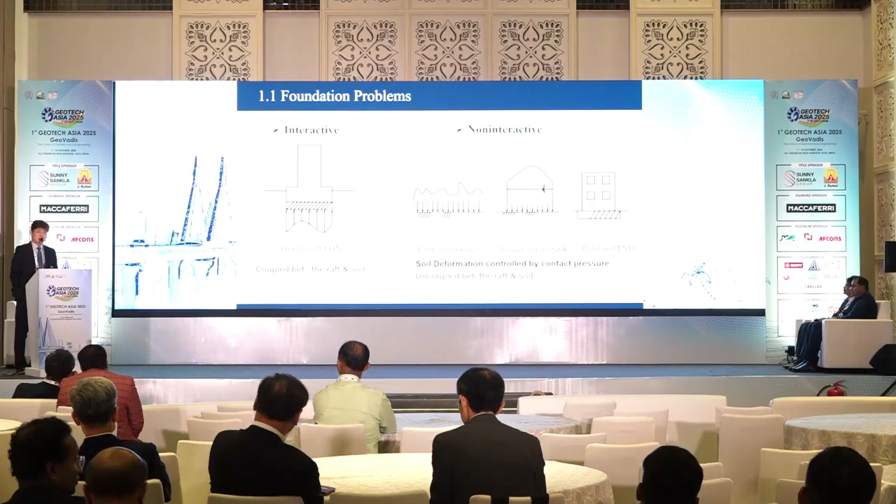This is a very typical example case you can encounter for foundation problems. The left one shows some kind of interactive problem, especially the coupling between the raft and soil. We call this an interactive problem. However, on the right, the figure shows non-interactive.

You can imagine some rigid or flexible foundations where there are no interactions between the raft and the soil; deformation is only controlled by the contact pressure. So we can define interactive and non-interactive. In the interactive case, we can imagine there are interactions between soil and foundations.

This figure shows some rigid foundation, a shallow one. The left one is a rigid foundation. This morning, Dr. Mark Barlow talked about deep foundations for laterally loaded piles, both flexible and rigid. Same as shallow foundations, rigid foundations have uniform settlement and are uncoupled from the soil. However, in flexible foundations, there are different contact pressures at different locations, a maximum and minimum, with non-uniform settlement and pressure expected. That's why we call this coupling between the foundation and soil.

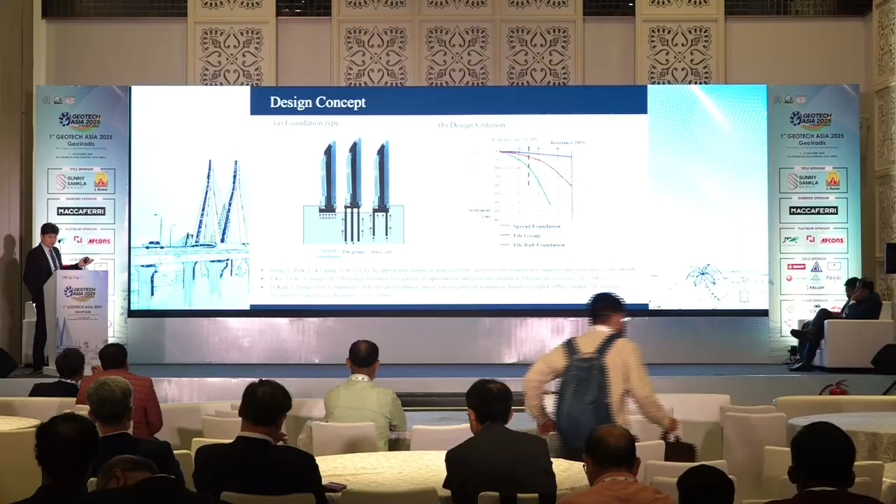Let's see a typical example of foundations supporting high-rise buildings. On the left figure is a shallow foundation, in the middle is a group of piles standing together, and on the right is the pile raft. Depending on the foundation type, we can expect different load-settlement behavior.

Why? Let's see. In this kind of concept, I published some papers on this, especially in the case of soil-structure interaction of pile-raft foundations. At the bottom are the journals where I published some papers on each of them.

So I can say most engineers these days focus on capacity-based design, everybody can do that. But in the case of settlement-based design, it's better to ensure serviceability of the superstructures. So we can make a small diameter with friction piles compared to large diameter bearing piles, reducing pile dimensions based on settlement-based design.

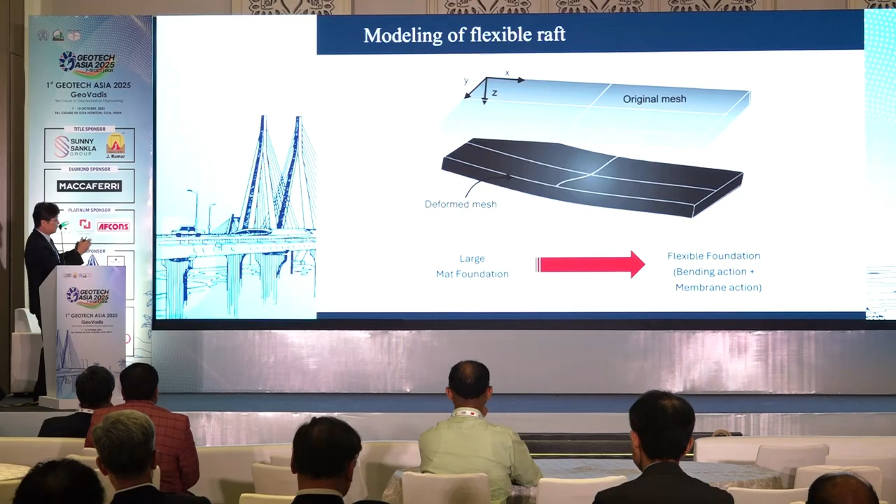Most rafts are not rigid; they show some kind of deformed behavior. I call this the flexible raft, most of them. To model this flexible raft, we can use members to account for this flexibility of the raft.

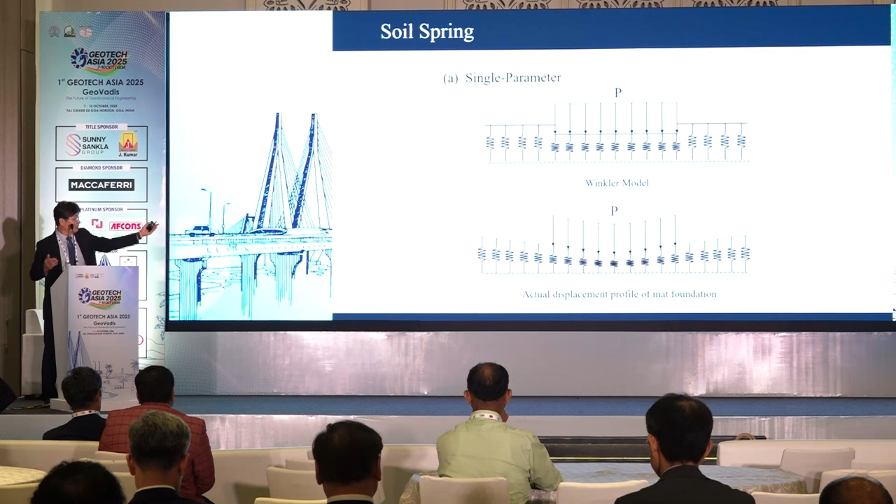So in the analysis, to account for this kind of flexibility and soil deflections, we can introduce some soil springs, like using a Winkler foundation plus some kind of shear interaction called here. I used the Pasternak model to account for the membrane effect of the foundation level.

So that's the key. This is a raft, and depending on many different loadings, like point, distributed, or bending moment applied on top of the raft, there is some resistance based on the raft and the soil part.

Account for this sequence, and next is piling. Why? It's a pile raft. So for the raft portion, we can account for flexibility in the analysis, also in the piling.

It's very simple. From an intermediate theoretical point of view, it looks like a beam column analysis. It's not very detailed, but in between simple and theoretical, it's a kind of beam column. You know well about the beam column for axial, lateral, and torsional behavior of the single pile and group piles.

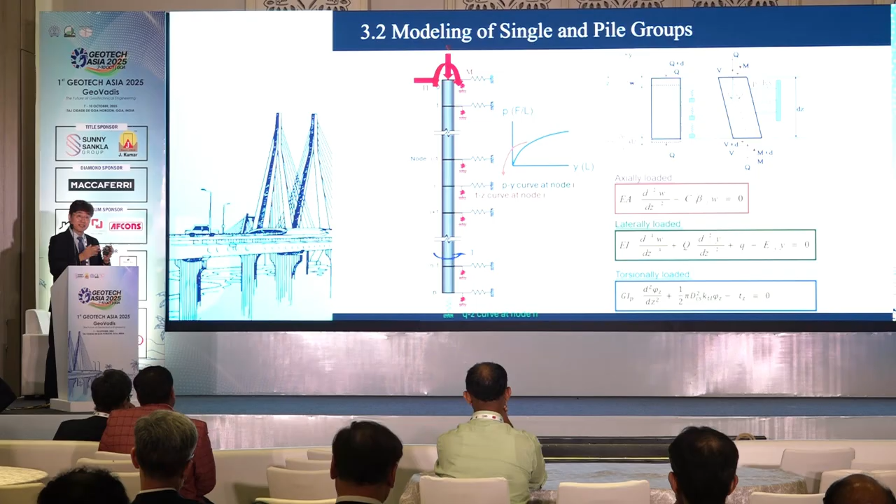Then we have corresponding differential equations, like governing equations, that we can introduce to incorporate this kind of behavior. And that's the key: it's piling and then raft.

There are interactions in between. At the interface, we call it the pile head or the raft, and there are some stiffness values like here.

At the interface, there are variations of translation and bending moment, and we can make a 6x6 coupled stiffness matrix to account for the pile-raft behavior. This is a typical case of a 6x6 soil stiffness matrix based on axial, lateral, rotation and coupling, which we introduce in the analysis.

Also, you see here that the pile raft and the piling itself are not linear in behavior. It gives us a load settlement behavior that looks nonlinear.

To capture this nonlinear behavior, mathematically there are iterations needed to capture the nonlinear load settlement behavior in the analysis.

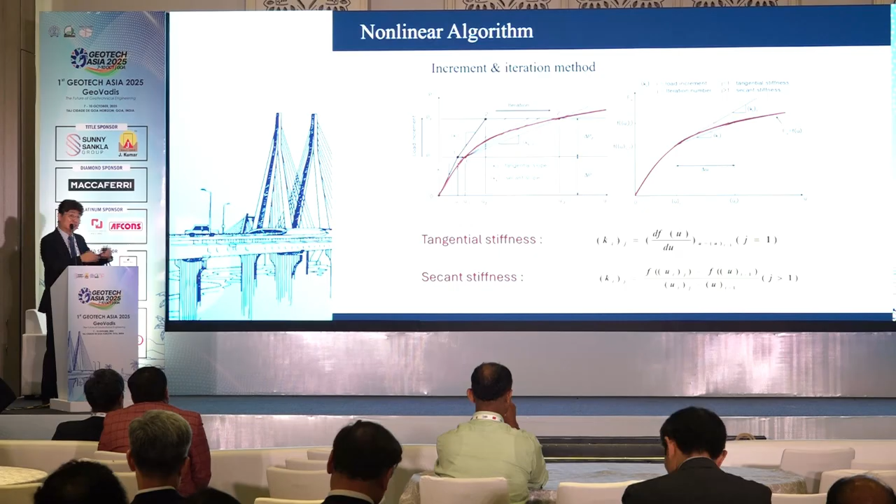To make a long story short, this pile raft has flexibility. We have the beam column and soil springs all together to involve the soil spring coupling effect. This method provides improved interaction modeling of raft, soil, and pile systems.

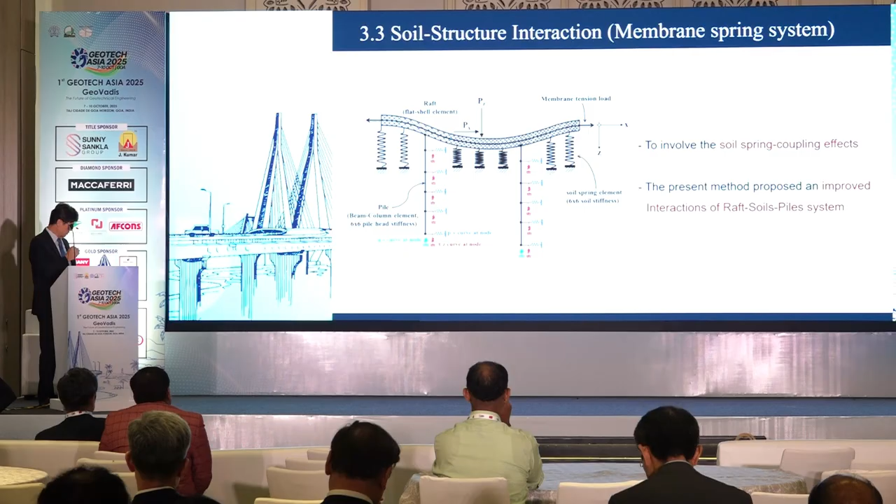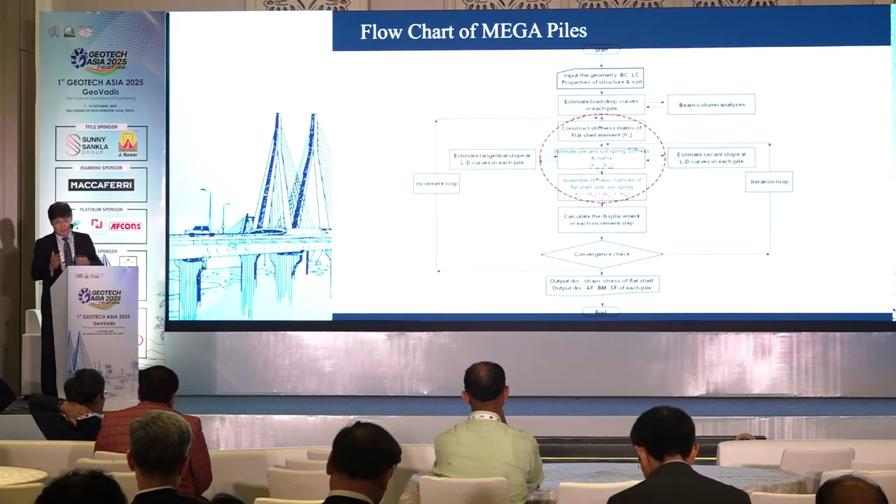This is the circular diagram showing the combination of all the stiffness contributions from piling, raft, and soil, making a global stiffness matrix. It's a typical structural analysis — you know these structural stiffness values that we can account for in the analysis.

And then finally, about 15 years ago, I proposed this analytical method to account for all kinds of external loading on this raft based on the piling systems, and we proposed this analysis for flexible raft foundation cases.

So I call this the mega piling — why? Because the piling and raft system is very mega, meaning big size, giving flexibility to the raft. That's why it's called mega piling. I made this into a commercial-style code, but it's actually an in-house code I developed, already used in the academic sector.

From now on, these are case studies we performed based on this analysis. I'm not the sole founder of this approach, because there are simple methods proposed by well-known professors Dr. Poulos and Randolph. They developed simple and complicated systems for pile-raft systems, but I also made our own code like this and compared our results with field case studies.

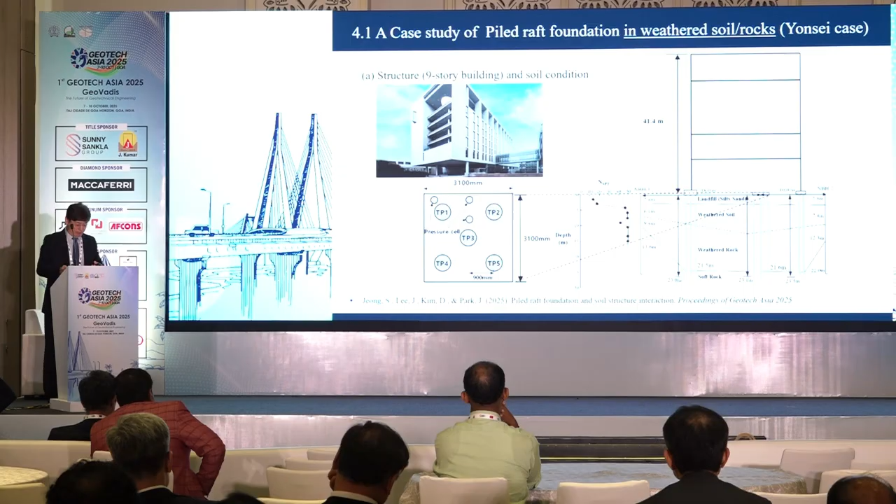And then we making instrumentations. So here, it's typical to measure the load transfer from the top to the bottom, and then we can install some kind of strain gauges and some pressure cells there.

Some of the instrumentations we performed, to make a long story short, as the building went from one-story up to 9-story buildings, we can install loadings versus the corresponding settlement of the foundation level, and then compare this measuring result with my analytical result, like here.

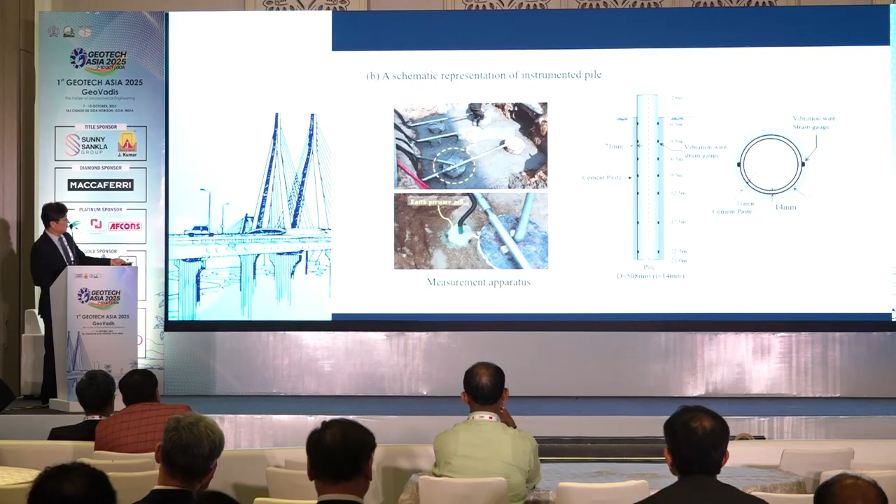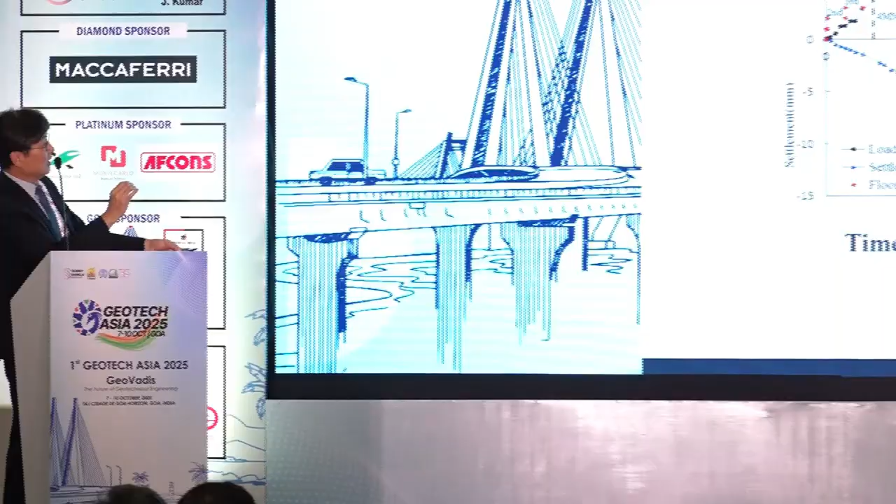This is the piling installed with strain gauges on the front and back side, and then we can make some measurement, and as the building story increases up to 9-story buildings, we can count on settlement behavior measured and compared. Our prediction result shows a dotted line, which is a kind of prediction by some mega piling code.

This is the total compared to some piling. Depending on the piling and the total loading, we can compare our calculation result with the measured result. It's not exactly the same, but we can capture most of the behavior. It looks like the same behavior as the installation process.

And then another one - there is a typical high-rise building constructed in South Korea, in a very good reconstruction site, and we have this system already done in Pohang, in the southern part of the Korean peninsula.

Our result compared, and based on thorough detailed site investigation results we obtained, and based on N-value and strength values all together. Finally, originally, our construction company made a basic original design. Based on our analysis, we can reduce the number of piles and the length of piles based on the raft analysis.

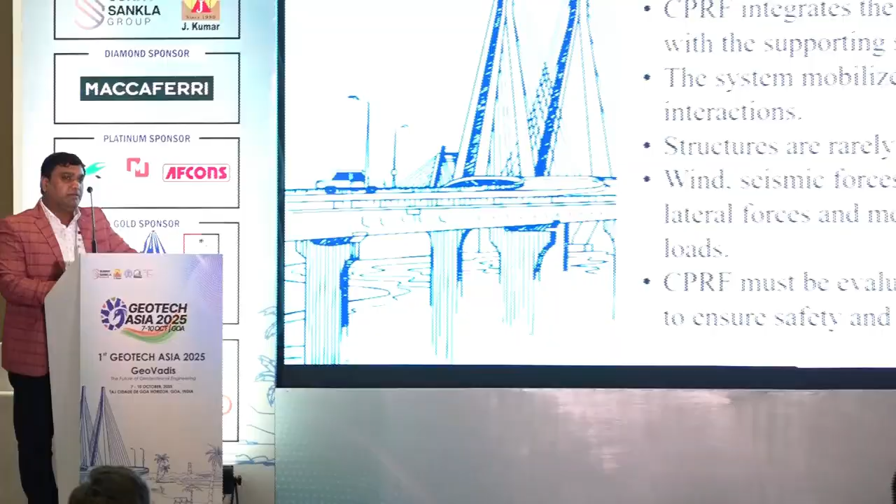As mentioned, the effectiveness of combined pile raft foundation is important for supporting high-rise buildings and heavy structures. In combined pile raft foundation, both raft and piles contribute to supporting the coming loads. While every structure has vertical loading, there can be simultaneous loading due to wind load, seismic load, and eccentric load, resulting in lateral loading. So it is very much needed to evaluate the performance of CPRF, combined pile raft foundation, under combined loading.

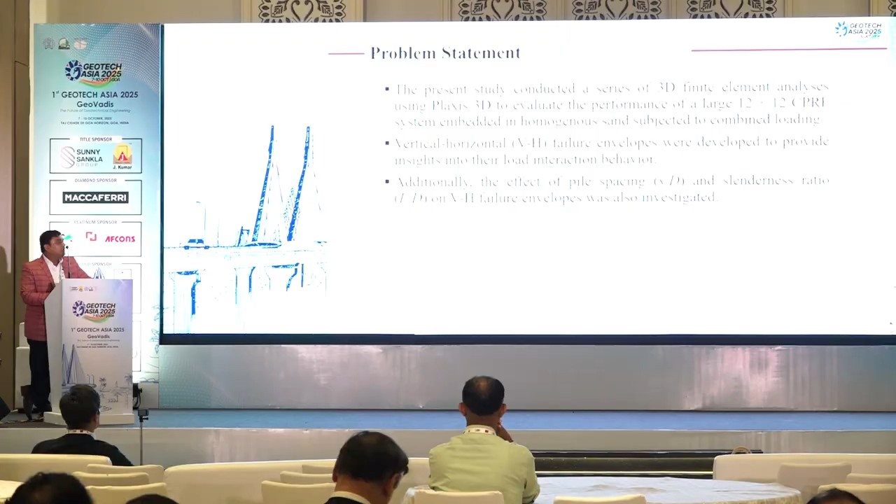In my work, I have evaluated the performance of a CPRF model of 12 by 12 configured piles in homogeneous sand, and I have developed vertical-horizontal failure envelopes to get insight into load interaction behavior. The effect of pile spacing and slenderness ratio has also been investigated.

These are the numerical models. On the left, we can see the 3D discretized model with boundary conditions, and on the right side, we can see the cross-section of the combined pile 12 by 12 group in homogeneous sand.

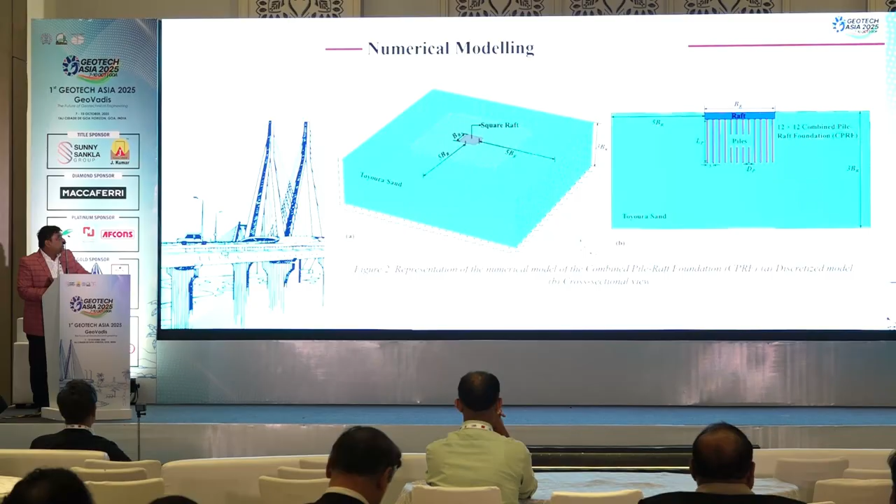In the study, I have modeled soil as Mohr-Coulomb, with linear elastic and perfectly plastic behavior. The raft and piles are modeled as volume elements with linear elastic material behavior, and the interaction between pile-soil and raft-soil has been simulated using interface elements, as shown in the modeling of piles in figure 2.

Before conducting the numerical study, the numerical model has been validated through a centrifuge experimental study conducted by Horikoshi et al., in which they used a 2 by 2 combined pile raft model in homogeneous sand. Table 1 shows the properties of the soil, raft and pile.

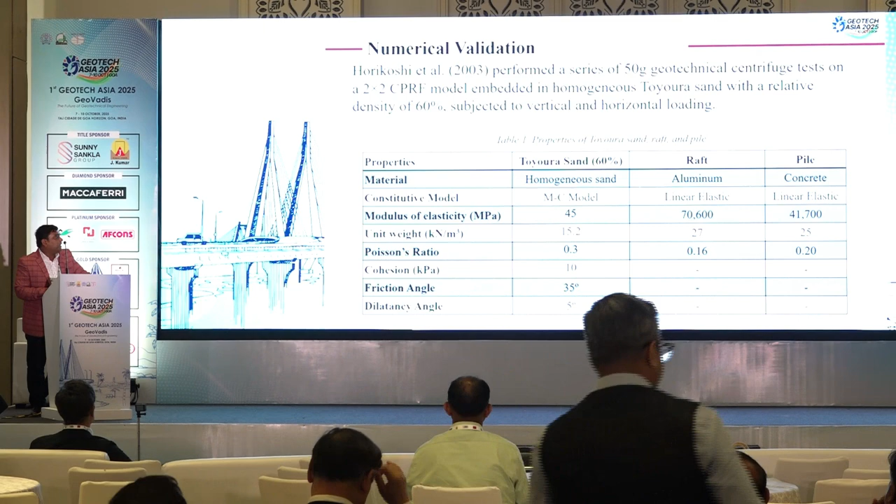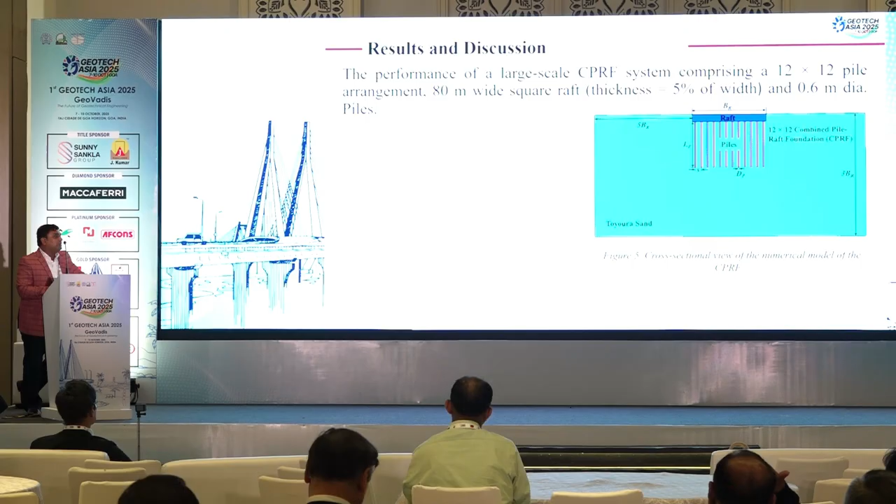For the current study, a 12 by 12 pile configured CPRF model having an 80 meter wide square raft with 0.6 meter diameter piles has been investigated, as shown in figure 5. Also, the pile slenderness ratio parameter has been varied from 25 to 40, and the pile spacing ratio effect has been investigated with variation from 4 to 7.

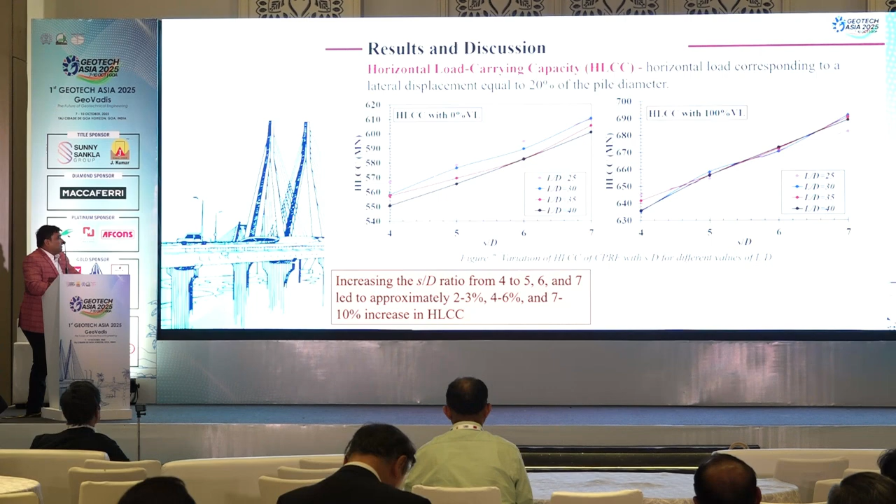Similarly, horizontal load carrying capacity variation has been investigated with and without the presence of vertical load. From the figure, we can see that with increment of S/D, horizontal load carrying capacity increases from 7 to 10%. With L/D ratio there is no significant impact, but in the presence of vertical load, there is around 11 to 16% increment in horizontal load capacity.

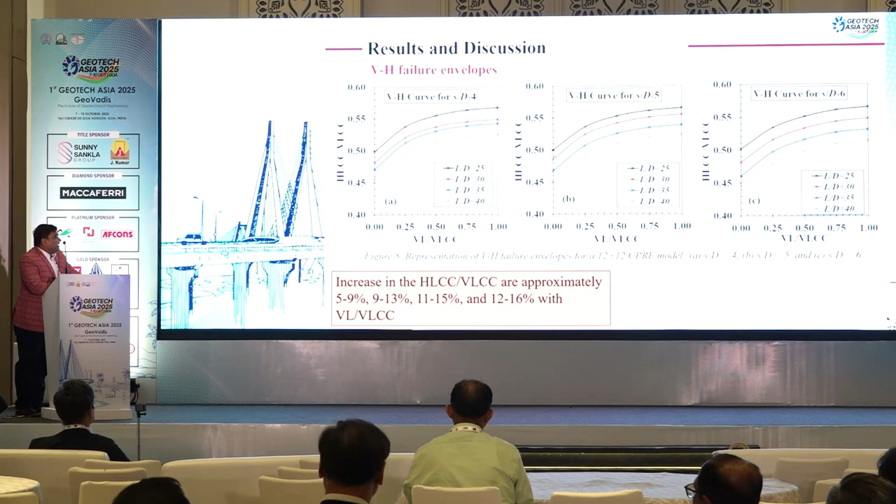Next, VH failure envelopes have been plotted for different L/D ratio and S/D ratio. We can see from the figure that with increase in the vertical load to maximum vertical load carrying capacity ratio, the ratio of horizontal load to vertical load increases, up to about 0.75, after which there is not much increment in this ratio.

Similarly, we can see the effect that with increase in L/D ratio, there is a decrement in the ratio of horizontal load carrying capacity to vertical load carrying capacity. Similarly, with increase in S/D, there is a decrease in the horizontal load carrying capacity ratio.

These are the percentage of the decrement. From the current study, the following conclusion can be made: it is very much needed to evaluate the performance of CPRF under combined loading, because we can optimize the design of CPRF.

Also, the impact of different pile spacing ratio and L by D ratio should be investigated, because pile spacings have significant impact on both vertical loading and horizontal loading. But from the current study and current model, L by D ratio effect is more significant on vertical loading, negligible effect on horizontal loading.

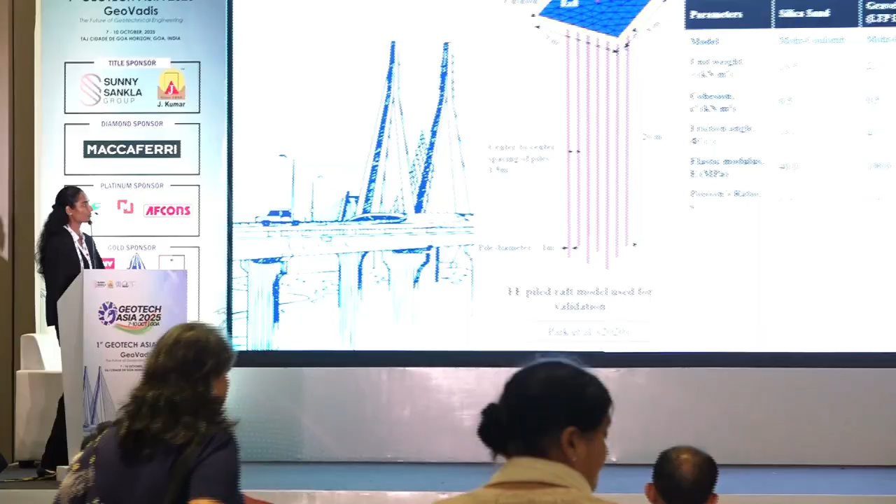To ensure the correctness of the model, a validation study was done on a 3x3 disconnected pile raft system with a 3 meter raft having a thickness of 1.5 meters. The table shows the material properties used, and on the right hand side we can see from the load settlement curve that the present analysis and FEM show 0.46 meter of settlement, which is in close agreement with Park et al. 2020, which shows 0.39 meter of settlement.

Now moving ahead with the results and discussion. For the effect of cushion thickness, I have varied the H by D ratio from 1 to 5. All the settlements are calculated at point A.

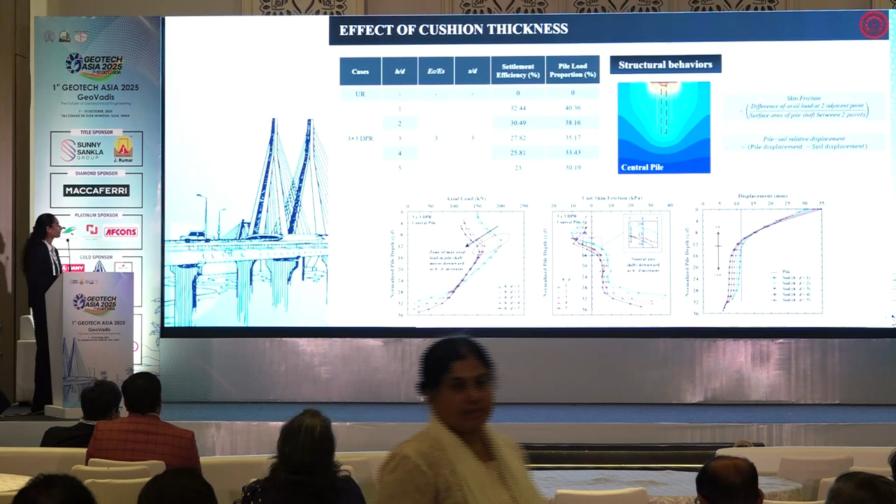Now looking at the structural behavior of the central pile, from the first plot we see axial load versus the normalized pile depth. For increasing H by D ratios, the zone of maximum axial load in the pile shaft moves downward as the thickness increases.

Next is the unit skin friction plot, in which we see that the neutral axis shifts downward as H by D increases. This can be explained through the last plot of pile-soil relative displacement, in which soil displaces more than the pile in the shallower depth, leading to negative skin friction, and below that the pile displaces more, leading to positive skin friction.

Next is the stress distribution plot. Here I have shown the stress below the raft and below the cushion. The stress below the raft is not uniform and is higher in magnitude, concentrated at the center. Below the cushion, with increasing cushion thickness, the stress is reducing and becoming more uniform. This can be further seen by the contour plots of stress on the pile head, where again with increasing cushion thickness the stress is reducing.

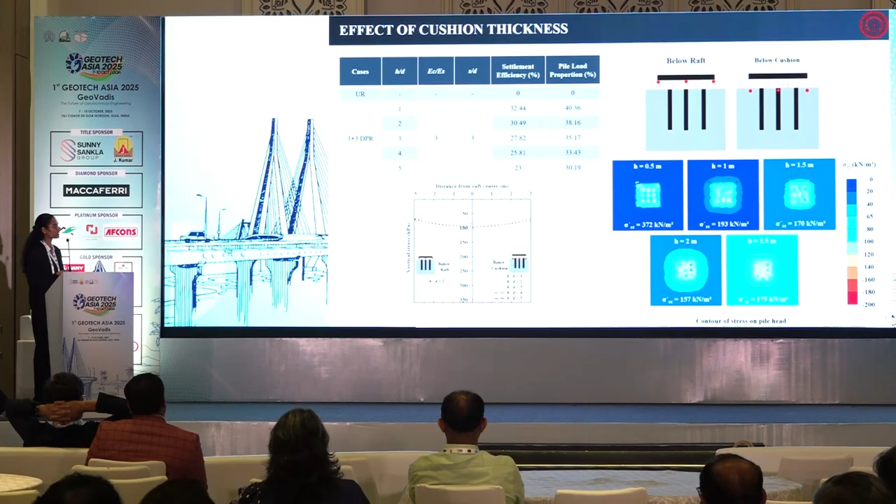For the structural behavior of the central pile, the zone of maximum axial load in the pile shaft moves upward as the stiffness increases. From the unit skin friction plot, we see the neutral axis shifts upward as the stiffness ratio increases, and the same trend is seen in the last plot of pile-soil relative displacement.

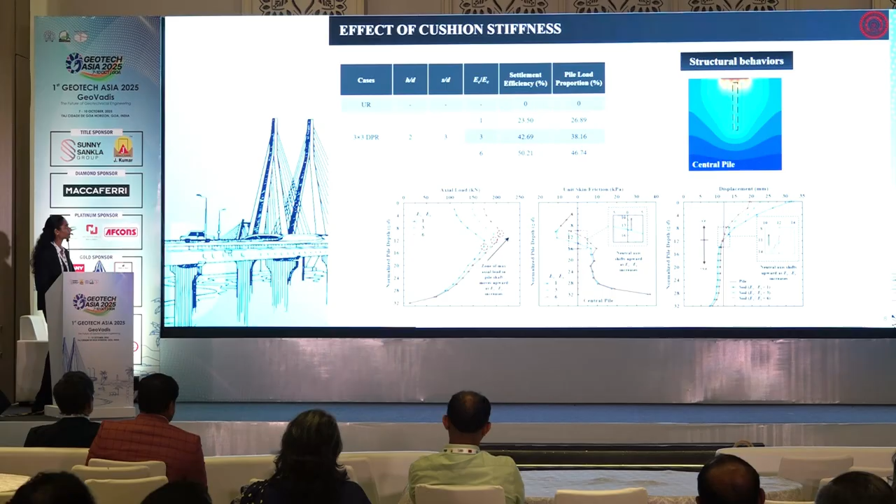Now for the stress distribution plot, we can see that the stress below the raft is increasing with the stiffness ratio, but below the cushion the stress is reducing as the stiffness increases.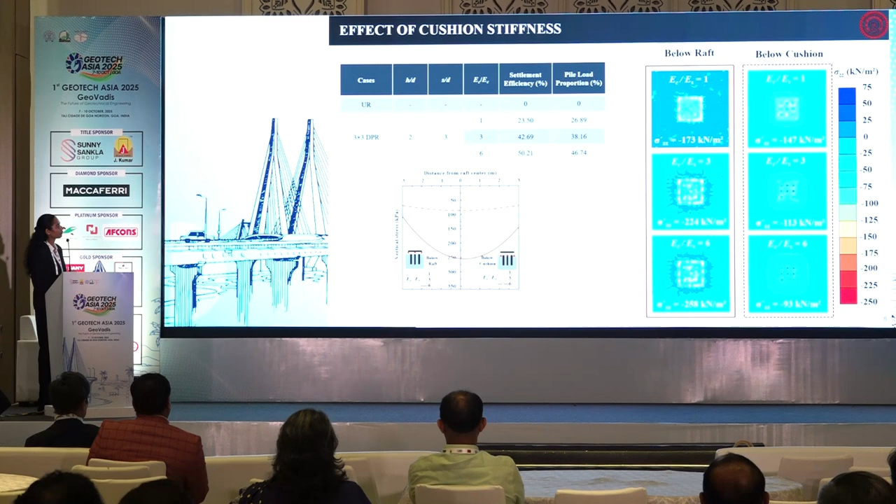This can be further seen from the contour plots, as we can see below the raft, with increasing cushion stiffness, stress is increasing, but below the cushion it is decreasing.

Going ahead with pile spacing influence, I have varied the pile spacing from 2D to 4D. From the load settlement curve, we can see that for unpiled raft, settlement is highest, but for all DPR cases settlement is less than that. For 2D we can see the difference, but for 3D and 4D it's almost matching, and pile load proportion is around 35 to 38%.

In structural behavior, the zone of maximum axial load of the pile shaft moves downward as the S by D ratio increases. The same can be seen from the unit skin friction. In pile-soil relative displacement, soil is displacing more at shallower depth than the pile, leading to negative skin friction at shallow depth and then positive skin friction.

For the stress distribution plot, below the cushion, for 2D spacing stress is around 125, and it reduces by almost 25% when increasing pile spacing to 3D, with minimum marginal change for 4D spacing. This can be explained through the contour plots at pile heads: for 2D the pressure bulbs are overlapping, for 3D it is just touching the pressure bulbs of each pile, and for 4D they are separated with no overlap. So we can say 3D is the optimum spacing.

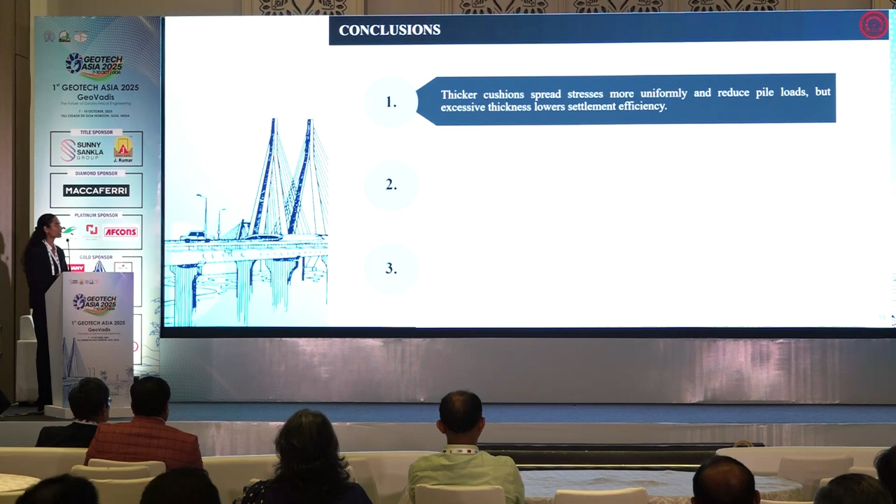Now based on this study, these are the conclusions I have drawn. Thicker cushions spread stresses more uniformly and reduce pile loads, but excessive thickness lowers settlement efficiency. Higher cushion stiffness improves settlement control and pile engagement, though the benefit becomes marginal beyond a certain stiffness. Increasing spacing from 2D to 3D enhances load sharing and stress distribution, but wider spacing adds little improvement.

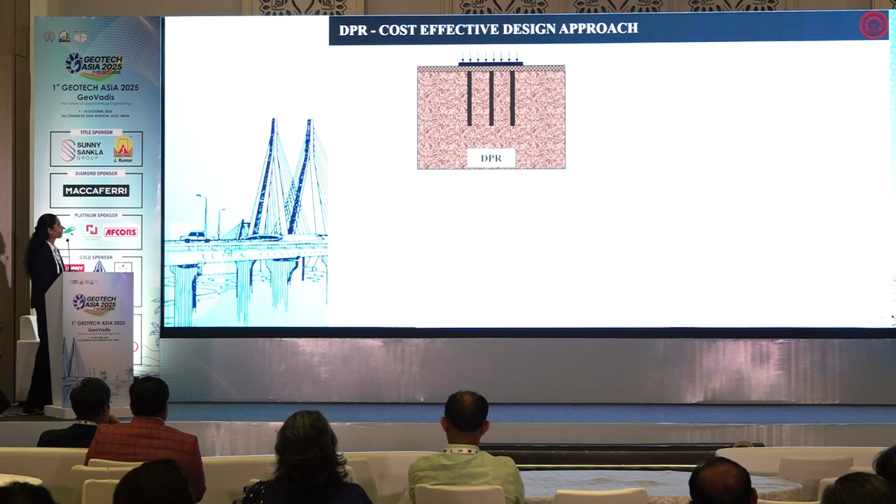Now we can see why DPR is a cost effective and economic design approach. In the disconnected pile raft system, piles are disconnected from the raft and act as subsoil reinforcement, increasing the overall stiffness of the system and reducing settlement. Load is distributed between the piles and raft, which not only improves performance but also makes it cost effective, as it leads to lower stresses, lower bending moment, and lower axial stresses. So a lower grade of concrete can be used, fewer piles are needed, and less reinforcement bars are required. So the disconnected pile raft system is a cost effective design approach.

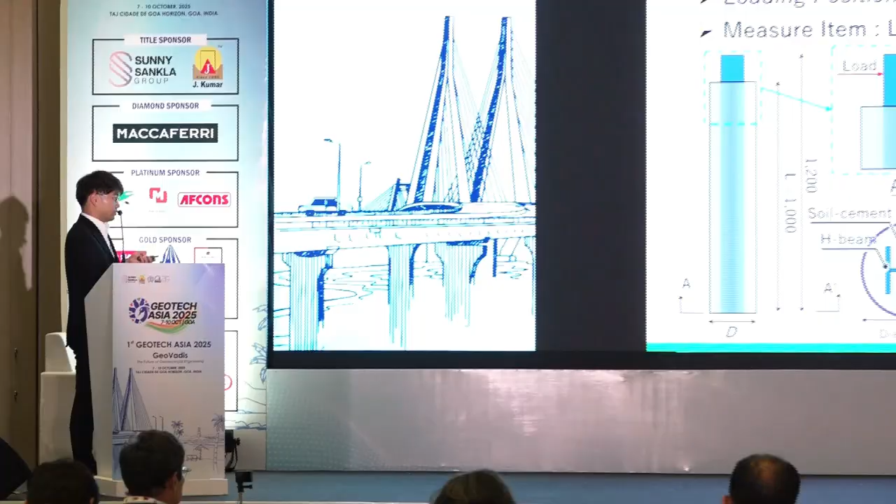In some cases, an acrylic cylinder was set to simulate underground conditions. The loading was applied in one direction, and the loading position was set at 150 millimeters above the soil cement. Lateral loading was applied by a loading jack, and in some cases, an axial load of 30 kilonewton was applied using this lever block.

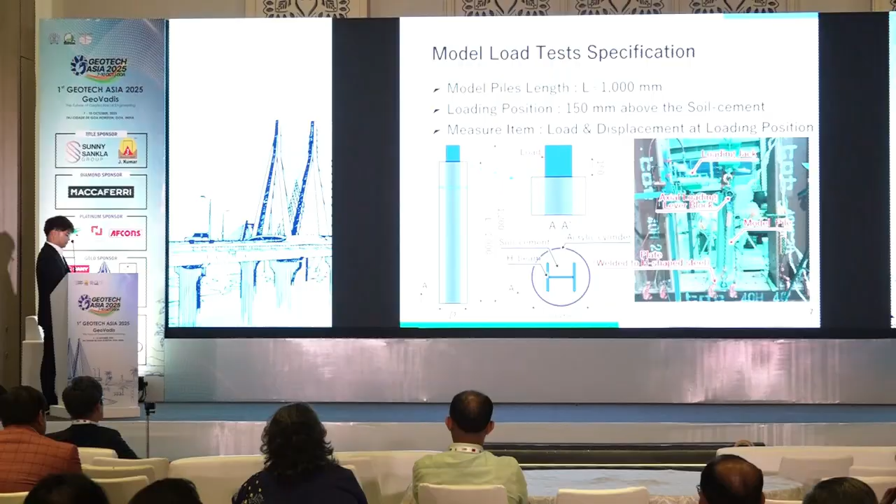First, I'd like to show the effect of the existence of soil cement and its diameter. Regardless of whether loaded in the strong or weak direction, the case with soil cement caused larger lateral loads at the same displacement compared to the case with H-shaped steel without soil cement.

Next, let's look at the effect of restraint of the pile body, which simulated underground conditions using the acrylic cylinder. For cases with a pile diameter of 200 millimeters, no clear difference due to restraint of the pile body was observed. However, in cases with a pile diameter of 300 millimeters, lateral resistance increased. Simply put, soil cement diameter affected the lateral resistance characteristics.

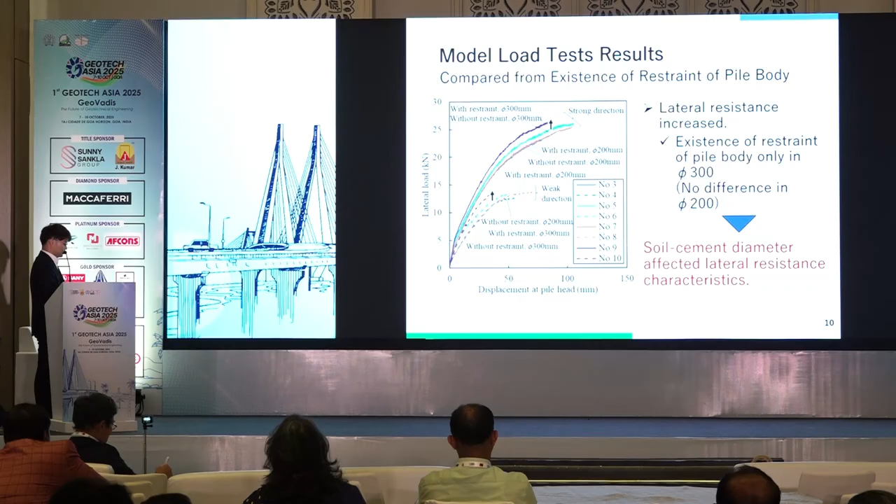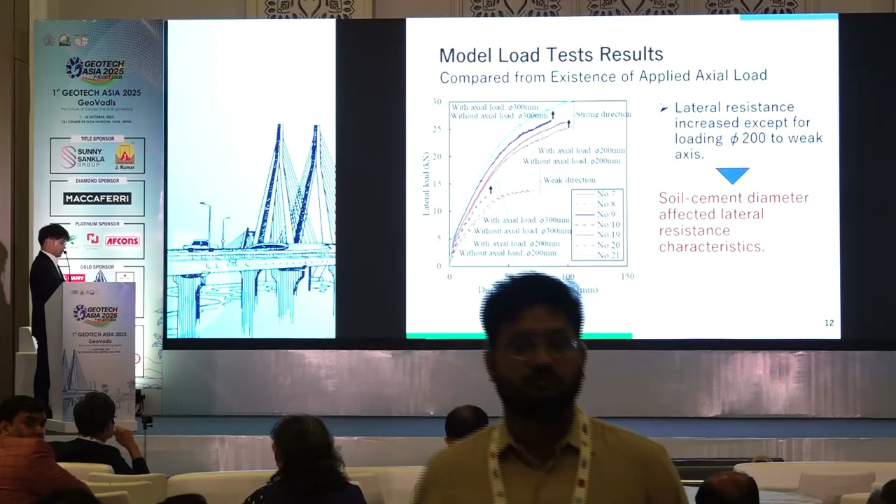Finally, this slide shows the effect of applied axial load. When laterally loaded in the strong direction, it is confirmed that the cases with axial load show larger lateral resistance than cases without axial load, regardless of pile diameter.

On the other hand, when laterally loaded in the weak direction, it seems that the cases with the pile diameter of 300 millimeters showed increased lateral resistance due to the axial load compared to the cases with the diameter of 200 millimeters. So it can be said that soil cement diameter affects the lateral resistance characteristics.

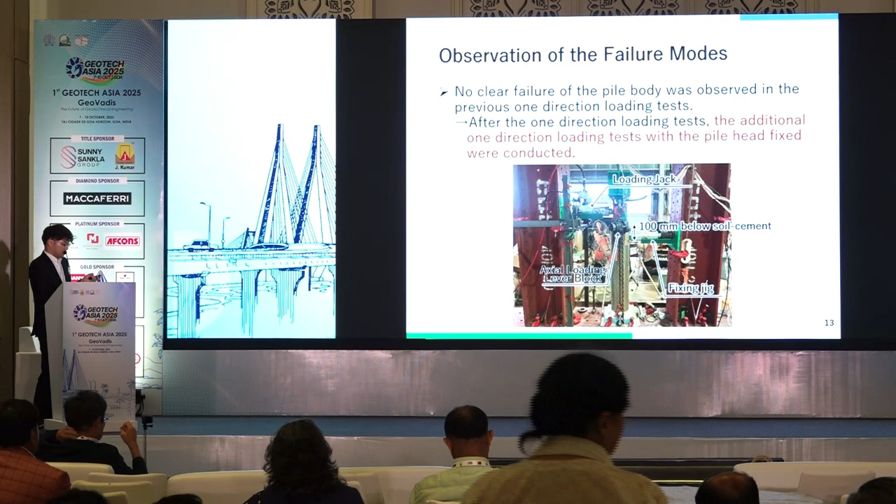In the previous one-direction loading test, no clear failure of the pile body was observed. Therefore, after the one-direction loading, an additional one-direction loading test with the pile head fixed was conducted. In these tests, the fixing jig was set 100 millimeters below the soil cement.

When loaded in the weak direction, similarly, diagonal cracks also appeared on the passive side of the H-shaped steel, and this side block was pushed forward. However, focusing on the pile diameter of 200 millimeters, horizontal cracks were observed all around the horizontal side of the soil cement. These observations suggest that the failure mode differs depending on the pile diameter, and the difference in failure modes affected the results of the one-direction loading test.

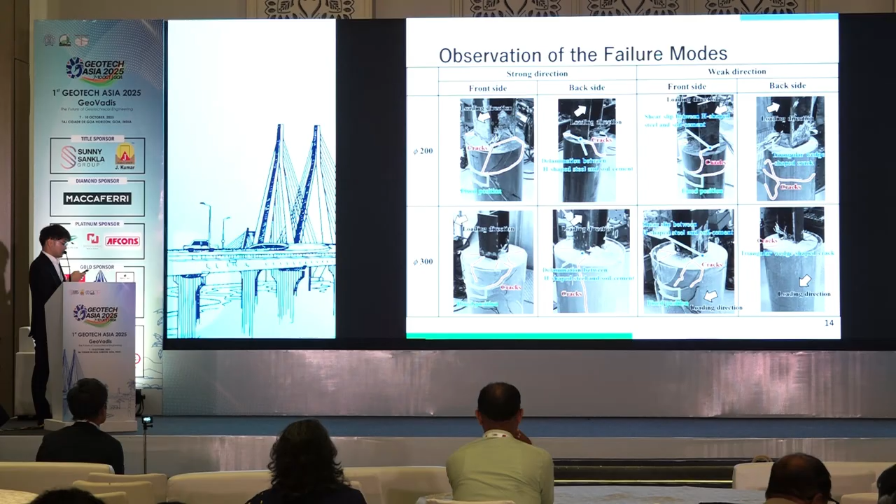I'd like to summarize the main findings of this study and close my presentation. Thank you for your attention.

So this is not matching. And here, this clay, actually we have to do the drained and undrained analysis for any kind of retaining walls. Then we looked around what can be the causes.

Then we identified that the water table is 8 meters below. Actual water table, when the pit was excavated, was around 8 meters, whereas during the soil investigation time, it was 4 meters. Also, it was excavated in a very short period, and it essentially went into an undrained mode.

But as a designer, can you consider it? Because the original water table was 4 meter, but in reality, when it was excavated, it is 8 meter. So as per BS 8002, whenever we design any kind of excavation pits, we need to consider the full amount of water pressure, the failure of the dewatering systems, and the possible flooding situations.

So here we can see, if we had shown the deepened pile caps near to the wall, the deflection, the toe movements would have been higher. Also, if by mistake the operator excavates another half meter more, the wall is going to collapse. So in almost all international codes, it's a must that you have to consider a half-meter additional excavation when you make a design. But Indian codes are actually silent on that particular aspect.

Now, here you can see how the water table is going to kill us. The original water table was 4 meter as per the soil investigation. At the excavation time, somehow it was 8 meter because it was excavated in summer. But if the water would have increased another 2 meter, the wall would have failed.

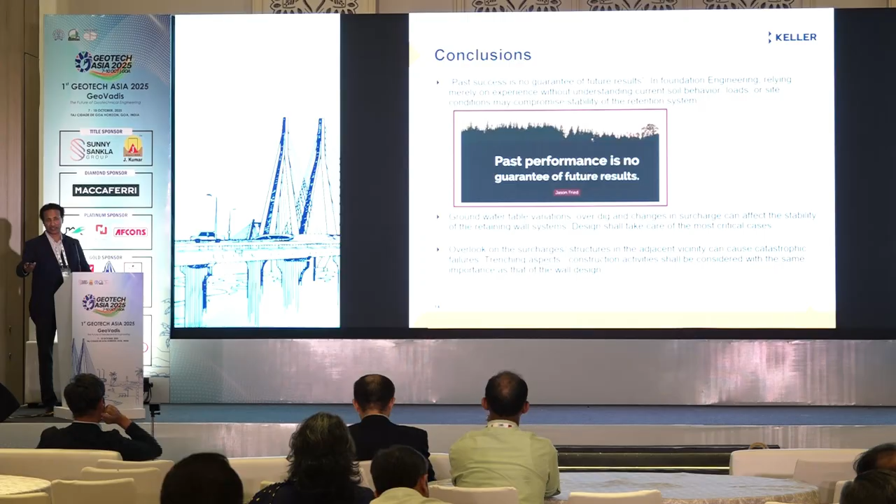So also, even though diaphragm wall is one of the best solutions across the world, it is not that we blindly go with a diaphragm wall. Maybe there will be case histories where there are nearby piles which can create trouble for you in the longer run. So we may have to look at even the construction aspects when you are going with a diaphragm wall. That's all. Thanks.

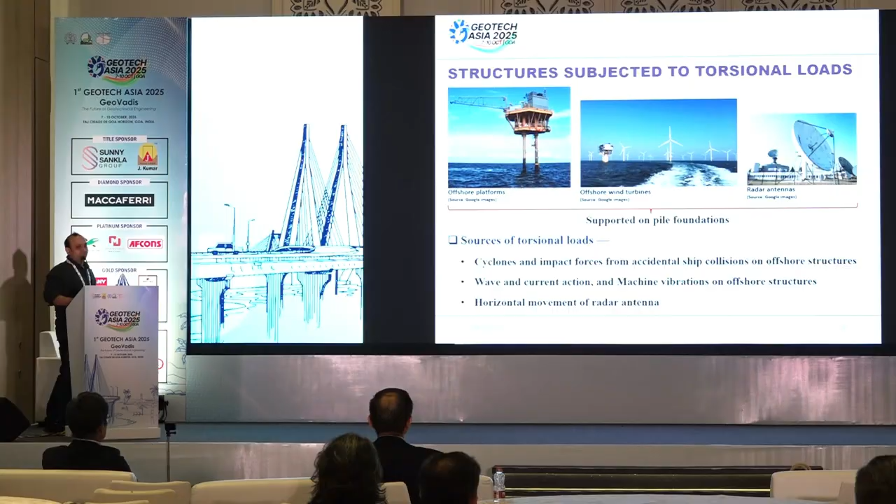So what are the sources of torsional loads for these kinds of structures? Cyclones and impact forces from accidental ship collisions on offshore structures can generate torsional loads. Wave and current action is always there, and there could be torsional load because of machine vibrations. For this particular case, the horizontal movement of this radar antenna can generate torsional load onto the pile foundations.

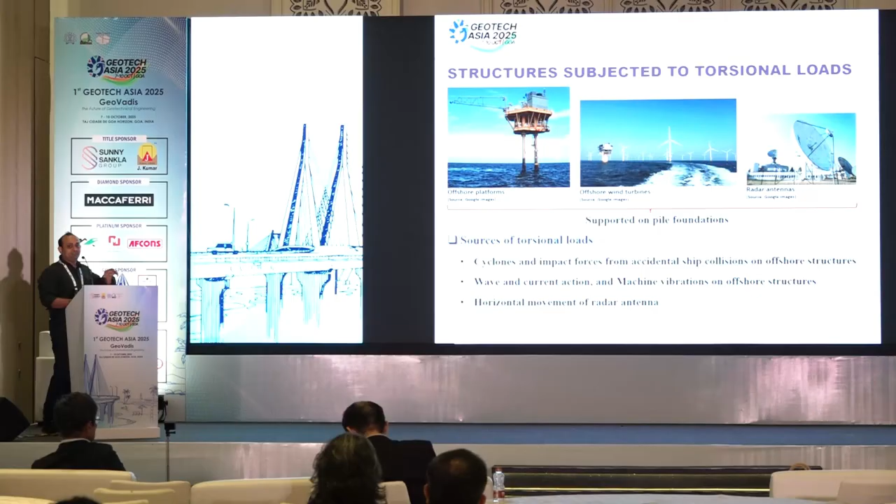So essentially, this presentation is on torsionally loaded piles embedded in anisotropic soil deposits. I'm going to talk about a small analysis that we have developed and bring in some results from it.

There are quite a few formulations available in the literature: simplified boundary element formulations, rigorous boundary element formulations, simplified analytical and numerical formulations, and rigorous analytical and numerical formulations. So what is the difference between simplified and rigorous formulations?

Usually it is the 1 parameter and the 2 parameter model that they have. Most of these formulations are either based on simplified theories or have complex mathematical schemes. What I am going to do is present a simple mathematical method which is rigorous as well as mathematically less complex.

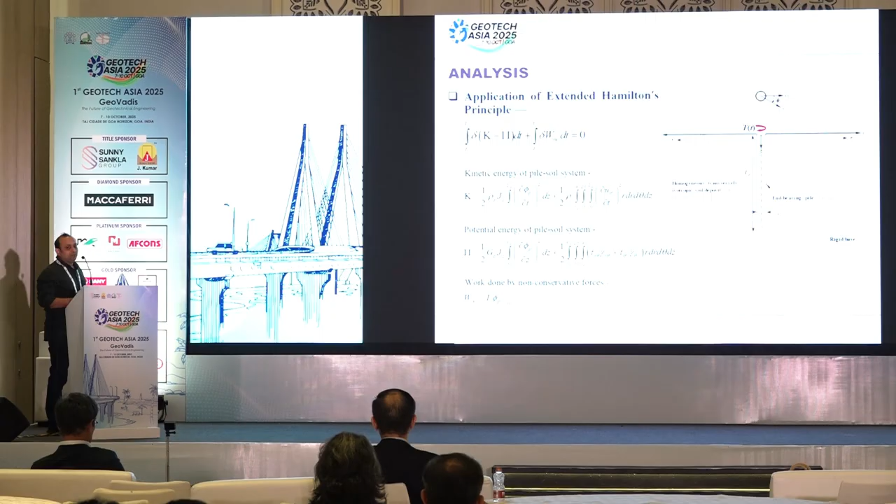One minute, please. Yeah.

So we get differential equations, which we end up solving analytically. And then finally, we verify our analysis with existing analysis in the literature.

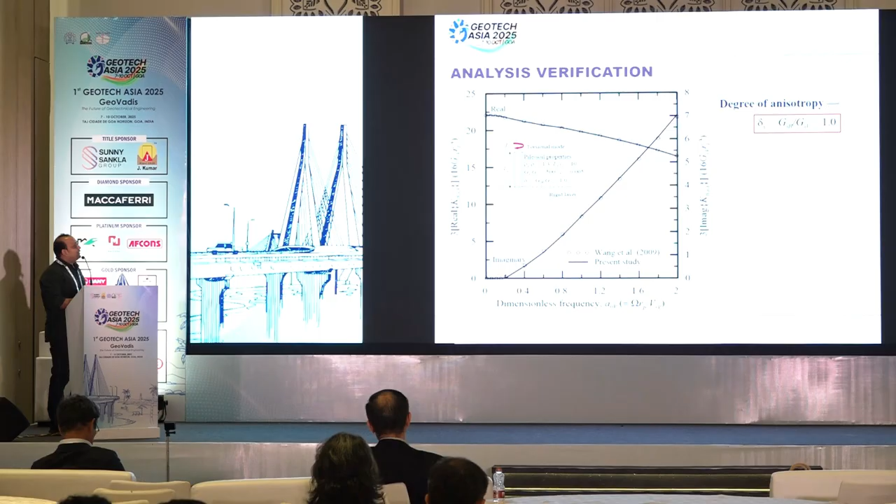You can see that I have the pile head stiffness versus the dimensionless frequency, and I end up getting an excellent match. For this particular problem, the degree of anisotropy is 1, where delta S describes the degree of anisotropy. To find the effect of anisotropy, you see that as the degree of anisotropy increases, the pile head stiffness also increases.

This is the real part of the stiffness, and this is the imaginary part. The imaginary part does not get affected much, but you see that oscillations arise as the degree of anisotropy decreases.

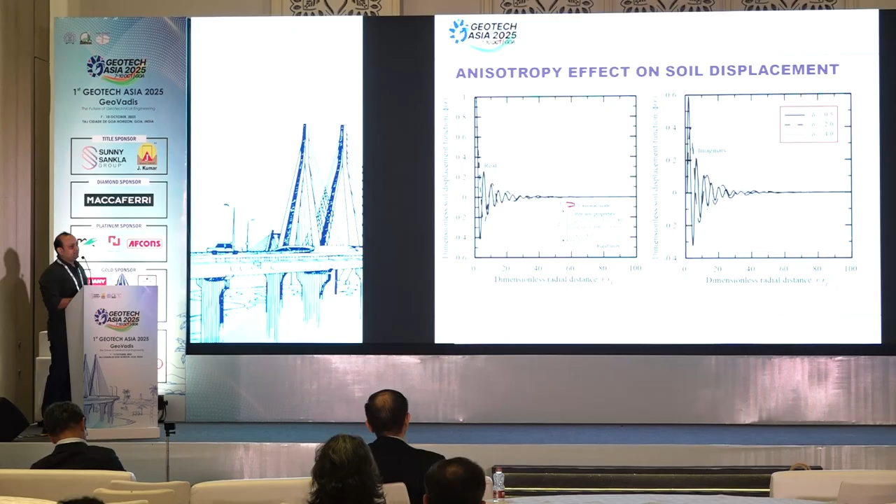Similarly, the effect of anisotropy on the soil displacement field has also been investigated. What I see is that as the degree of anisotropy decreases, the rate of displacement increases with radial distance. So here are some of the conclusions from the study.

Present formulations produce excellent and accurate results. Degree of anisotropy substantially affects the prediction of pile head stiffness. Real part of pile head stiffness reduces with decrease in the degree of anisotropy. Imaginary part varies within a narrow band. Degree of oscillation increases with decrease in the degree of anisotropy. Rate of soil displacement function increases with decrease in the degree of anisotropy.

So here are some conclusions from the study, from the analysis that we have found by running a few results. So this is all from the presentation. Thank you. If you have any questions, you can ask me.

It's a good study. You have given at the end general conclusions. You could have given your study-specific conclusions. That is the only suggestion.

Any further questions? We can take up.

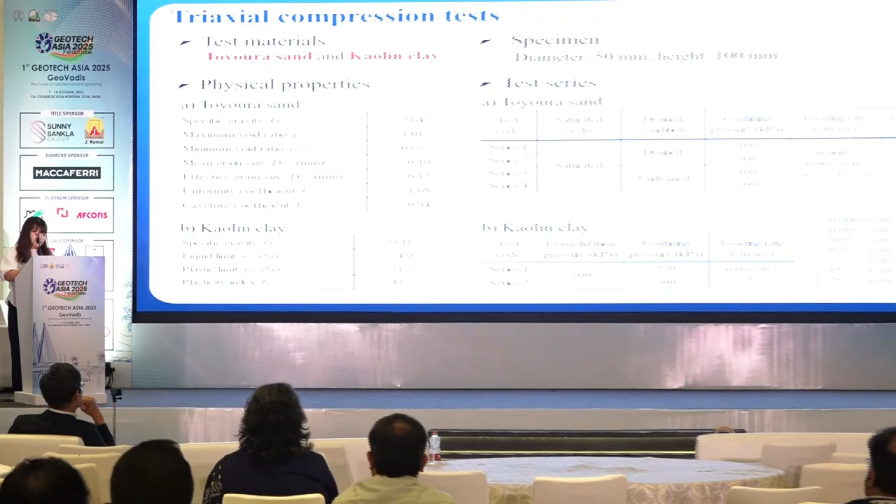In our series, the relative density was set to 80%, because we wanted to simulate the behavior of ground at the pile tip. All the tests were conducted under saturated conditions. Series 1 and 2 were drained tests at confining pressures of 100 and 500 kilopascals, while Series 3 and 4 were undrained tests with the same pressure conditions.

For kaolin clay, the consolidation stress was 500 kilopascals, and the confining pressure was 250 and 500 kilopascals. For Toyoura sand, we tested 7 loading rates from 0.0005 to 25 centimeters per second. And for kaolin clay, 3 rates at 0.005, 0.5, and 25 centimeters per second.

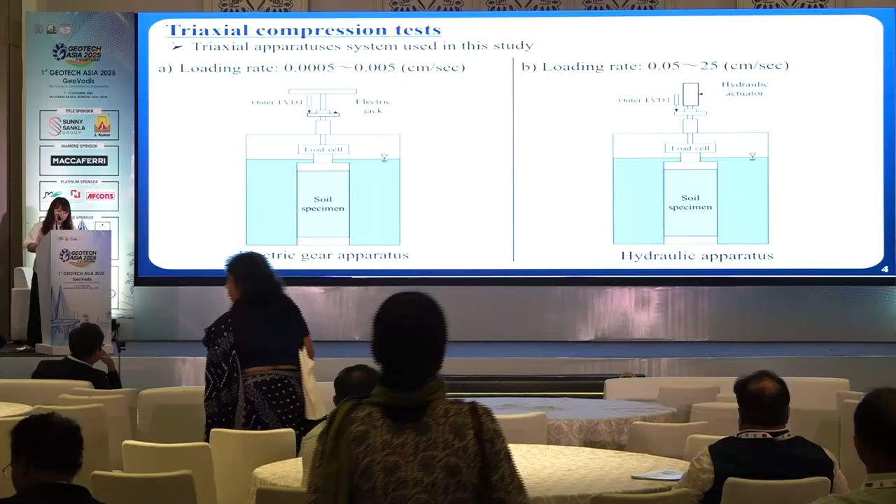This figure shows the triaxial apparatus system used in this study. For low loading rates of 0.0005 and 0.005 centimeters per second, we used an electric gear apparatus. For rates between 0.05 and 25 centimeters per second, a hydraulic apparatus was used.

These apparatus systems maintain a constant loading rate, cancelling the effect of inertial forces and allowing for the measurement of only rate effect. To confirm this, the acceleration was calculated by taking the second derivative of the measured displacement. By multiplying this acceleration by the specimen mass, the inertial force was confirmed, but it was a value infinitely close to 0.

On the vertical axis, each value is measured. Moving on to the test results of Toyoura sand, these graphs plot loading rate on the horizontal axis and normalized values on the vertical axis. Each value measured at a given loading rate is normalized by the value at the lowest loading rate of 0.0005 centimeters per second.

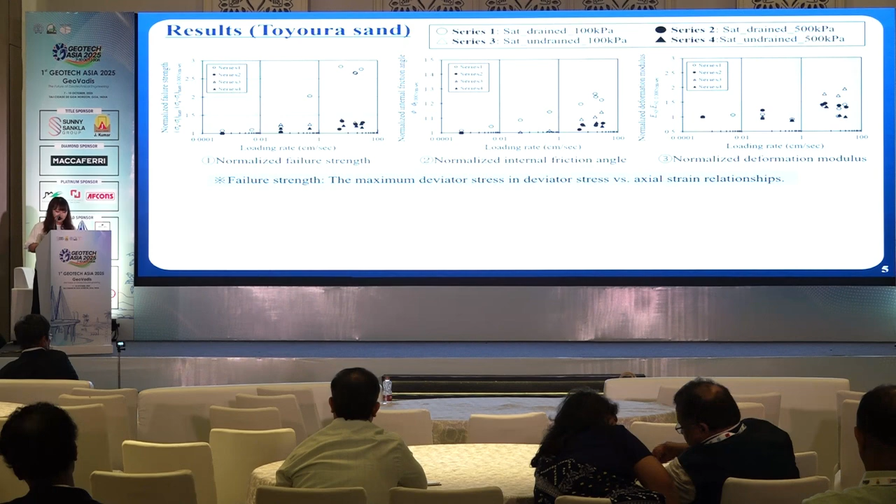First, look at the normalized failure strength. In Series 1, saturated sand under partly drained conditions shows a sudden increase of peak strength from 0.05 centimeters per second. From the relationship between deviator stress and axial strain, the peak strength at a loading rate of 5 centimeters per second approaches that under undrained conditions.

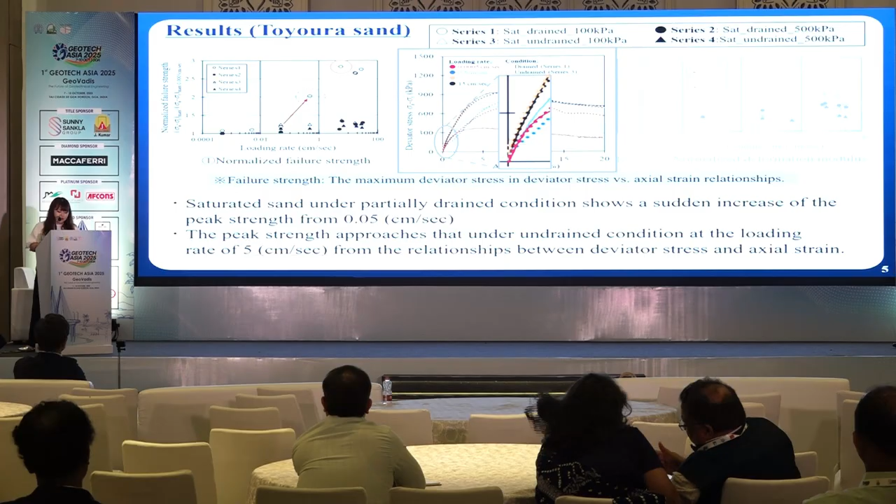In addition, the effect of loading rate on increase in stiffness was confirmed. This sudden increase in peak strength is mainly because the loading rate is faster than the rate of pore water pressure dissipation, and partly because the deformation mode changes. The loading rate effect of granular materials is said to be affected by these three factors. Although these limited tests don't allow us to draw general conclusions about each of the three aspects, we can talk about the overall influence of strain rate on strength and deformation in the next slide.

Next, the internal friction angle at the maximum stress ratio was calculated. At a loading rate of 25 centimeters per second, the normalized internal friction angle is about 1.25 times larger than the value from the triaxial test conducted at the recommended strain rate of 0.0005 centimeters per second.

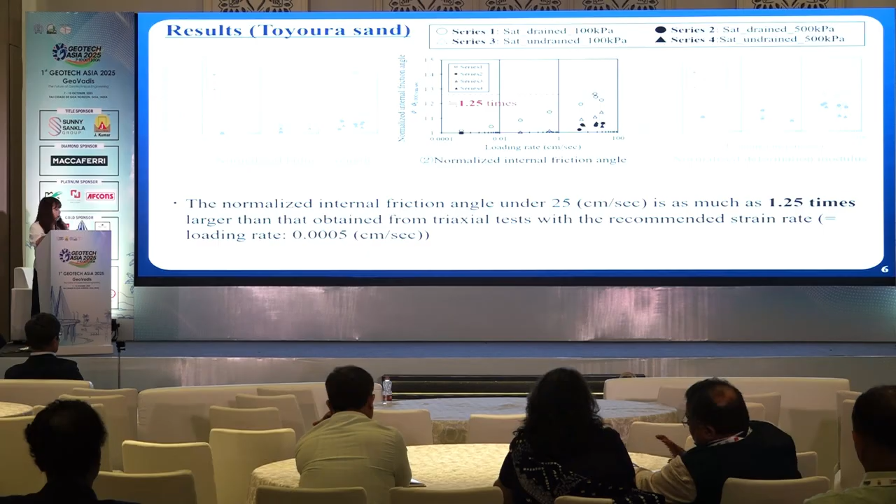This graph plots deformation modulus against loading rate relationship. The deformation modulus increases with higher loading rate, becoming about 2.0 times larger in Series 3.

Even sand with high permeability, looking at the results for Toyoura sand, this highly permeable sand shows increases in all the values because of the rate effect.

Now let's look at the result for kaolin clay. Here is a graph showing how the normalized failure strength changes with loading rate. Regardless of the confining pressure, as the loading rate increases, the values get larger. At the loading rate of 25 centimeters per second, the failure strength increased by about 30 to 45%.

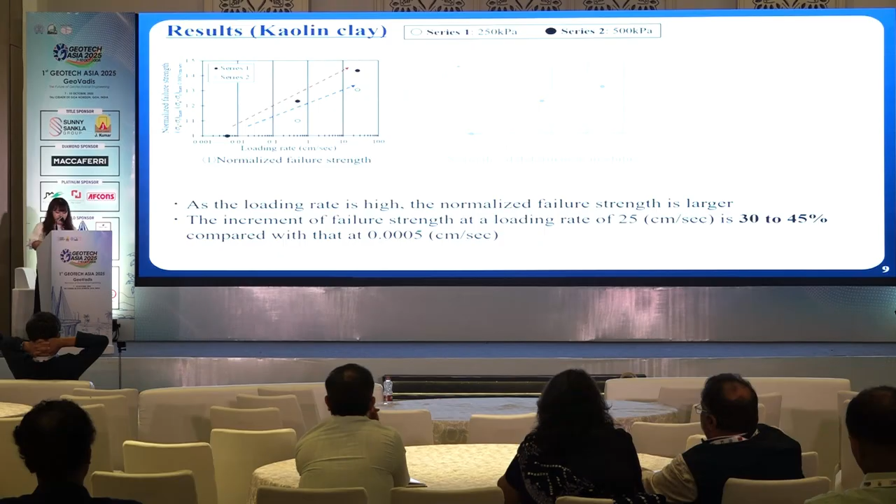Here are the conclusions of this study. That's all for my presentation. Thank you for your attention. Any questions?

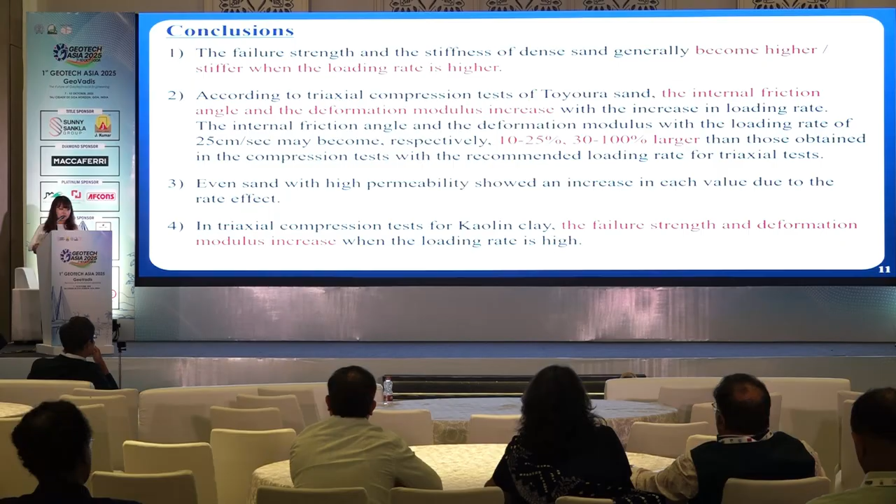Next presentation is... thank you. Thank you.

Static and rapid load test with various interpretation methods on steel pile in sandy ground. By Ramakrishna Mandal, Sushira Kami, Isaku Yamahato, and Tatsunori Matsumoto.

Good afternoon, everyone. I am Ramakrishna Mandal from Jibanshikenjo Company, Tokyo, Japan. I am going to give a presentation on static and hybrid dynamic rapid load tests on steel piles in sandy ground. The contents of my presentation are here.

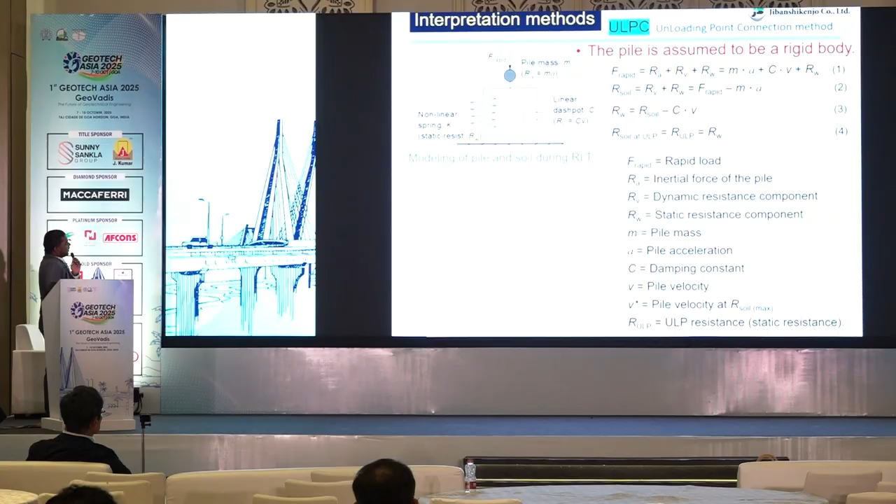In this method, the pile is assumed to be a rigid body in which a non-linear spring expresses the static resistance and a linear dashpot expresses the dynamic resistance. The pile has a mass, and F-rapid and acceleration are measured. F-rapid is the sum of dynamic and static resistance, given in equation 1.

R soil is estimated using equation 2, and static resistance is estimated using equation 3. This figure represents the relationship between the load displacement curve, static soil resistance, and ULP resistance.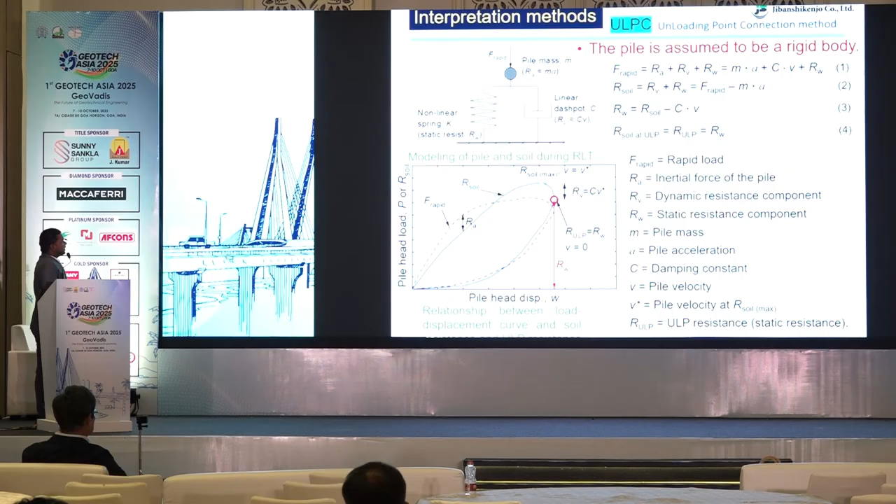Here, the horizontal line is the pile head displacement and the vertical line is the pile head load. The black line is the applied rapid force, the blue line is the soil resistance, and this red point is the static soil resistance. At the maximum pile head displacement, when the velocity is 0, that point is regarded as the static soil resistance, also given in equation 4.

In ULPC, in the hybrid dynamic rapid load test, multiple blows are applied to the pile head, and at the maximum pile head displacement, the static load displacement is obtained by connecting the static resistance points, giving us the static load displacement curve.

Now the next one is ULPC-CM, the unloading point connection invoking the case method. In this method, the pile is treated as an elastic bar in which a downward driving force and upward driving force are calculated using equations 5 and 6. RT is the R soil, which is estimated from equation 7.

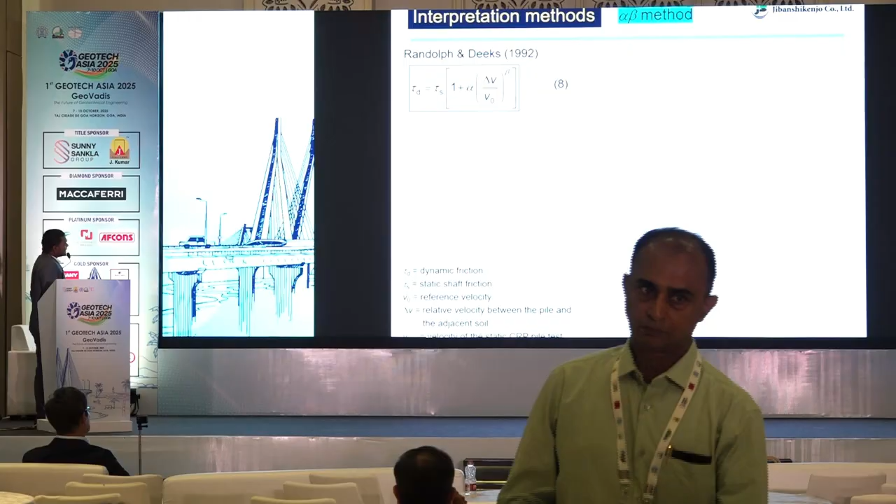Now the third interpretation is the alpha-beta method. Equation 8 is the modeling of a pile, given by Randolph and Deeks in 1992. And third is the technique to estimate the static soil resistance, given by Brown in 2004.

Equation 10 is just an extension of equation 9. Now, the new proposed method, the alpha-beta method.

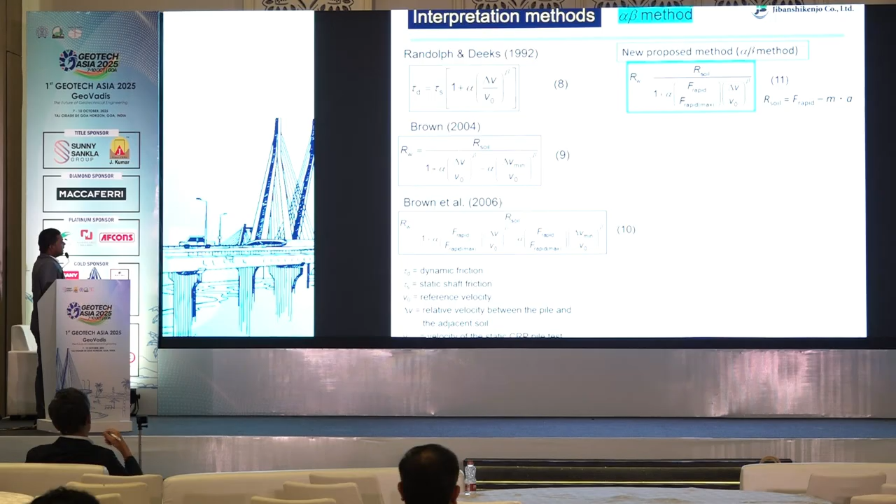In this method, generally in Japan, the load test is conducted as a static load test in which the minimum velocity is 0. So equation 10 can be modified.

Conclude in 1 minute, please. 1 minute? Yeah.

This is the new proposed method. At F-rapid max, R_w equation 11 can be written as equation 12. The same thing is shown in this figure.

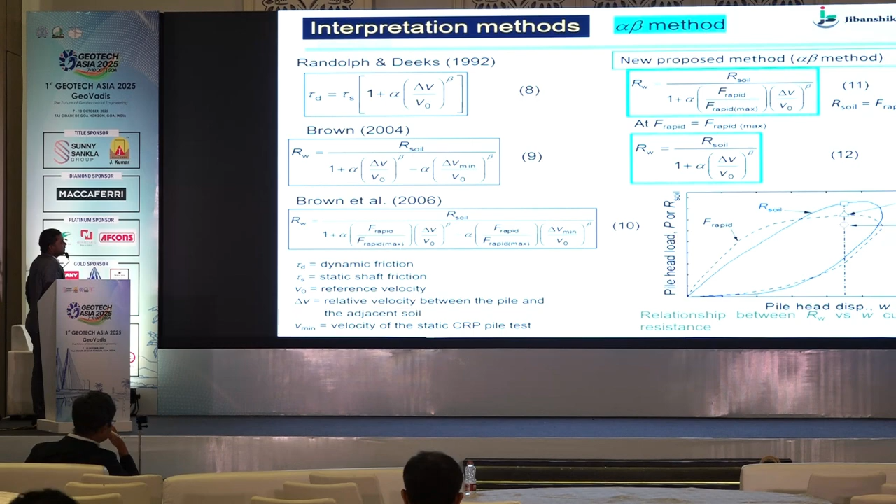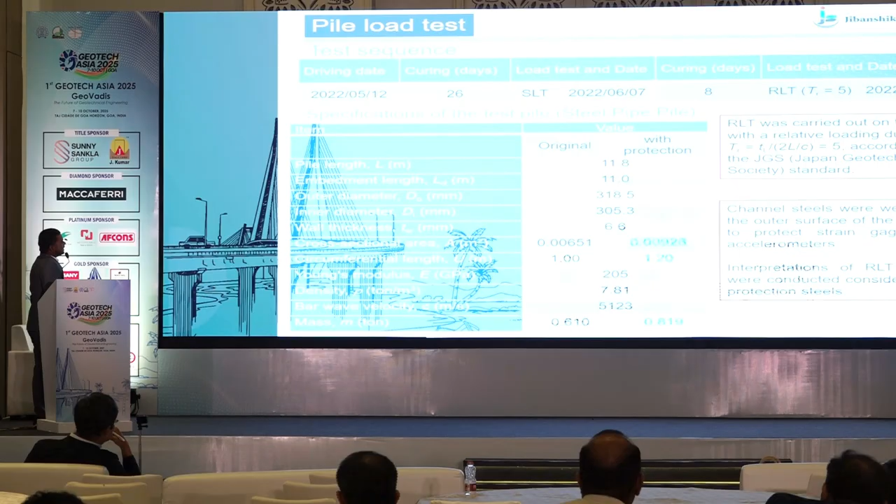This is a test sequence specification of the test pile having a pile length of 11.8 meters and embedment length of 11 meters.

At the maximum pile head displacement, the velocity is 0, then a static soil resistance is obtained.

The proposed range of alpha and beta: we use alpha equal to 0.1 and beta equal to 0.2 because the site is sandy ground.

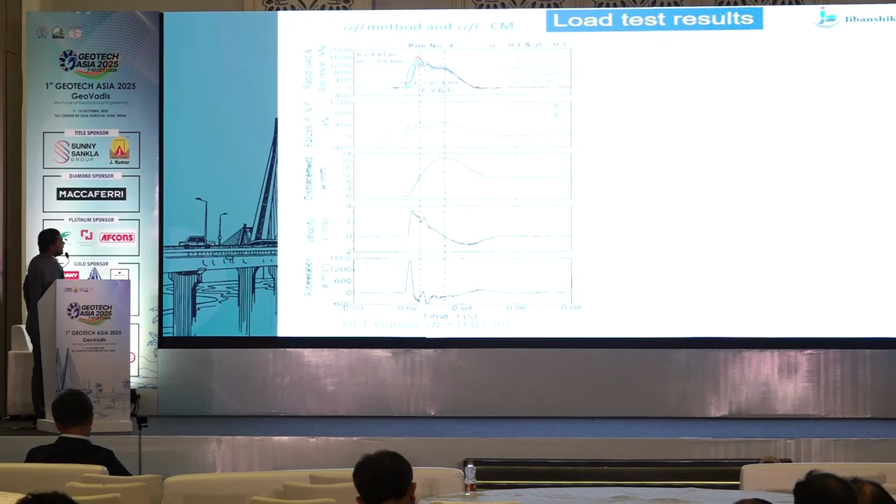These are RLT signals. In this alpha-beta method, the R soil is estimated and obtained at the F rapid max.

This is the relationship between F rapid and static soil resistance using alpha-beta, and this is using the alpha-beta CM method. Now the load test results.

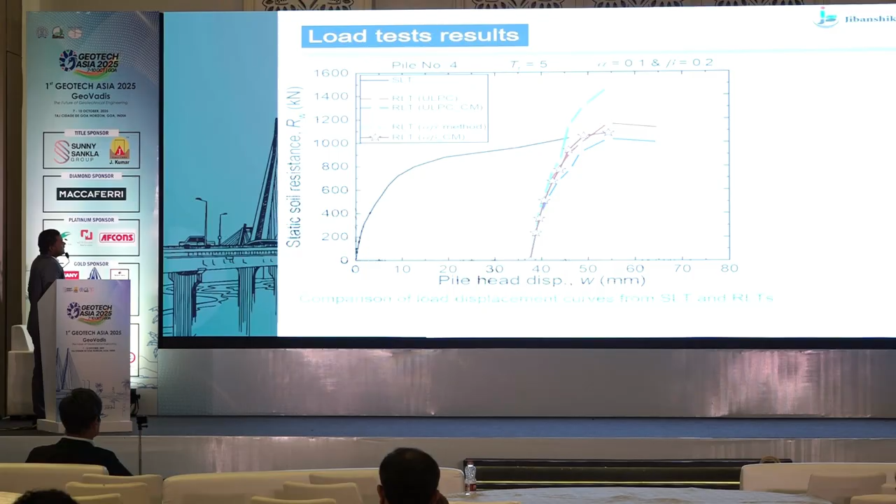The static soil resistance curve from the ULPC slightly overestimates the SLT results. This is the red line.

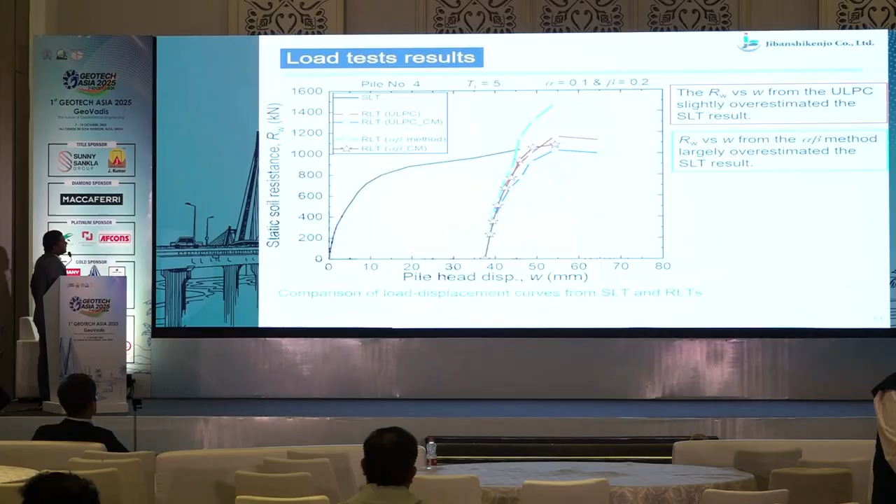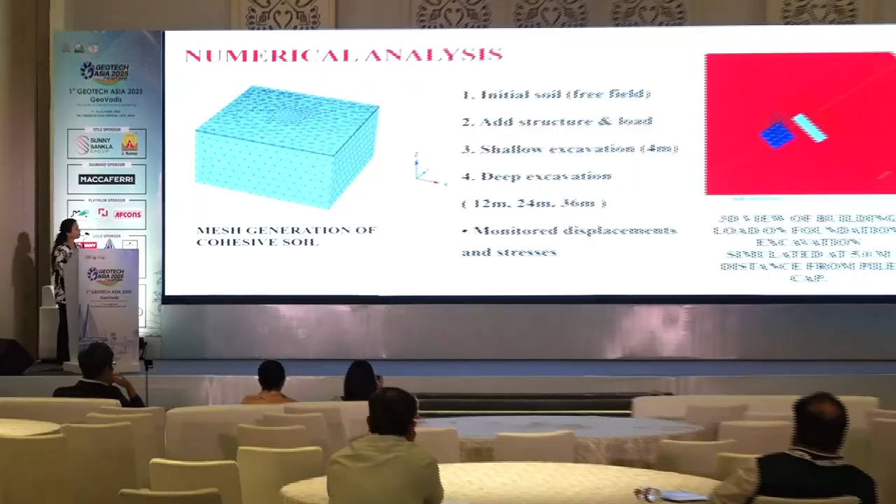Coming to results and discussions, as we moved towards the excavated side, we saw significant increase in displacements, that was settlement as well as lateral displacement.

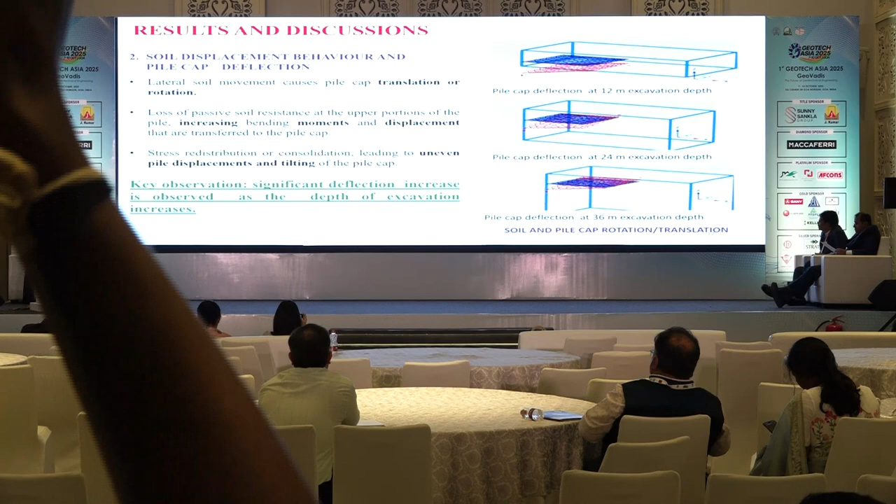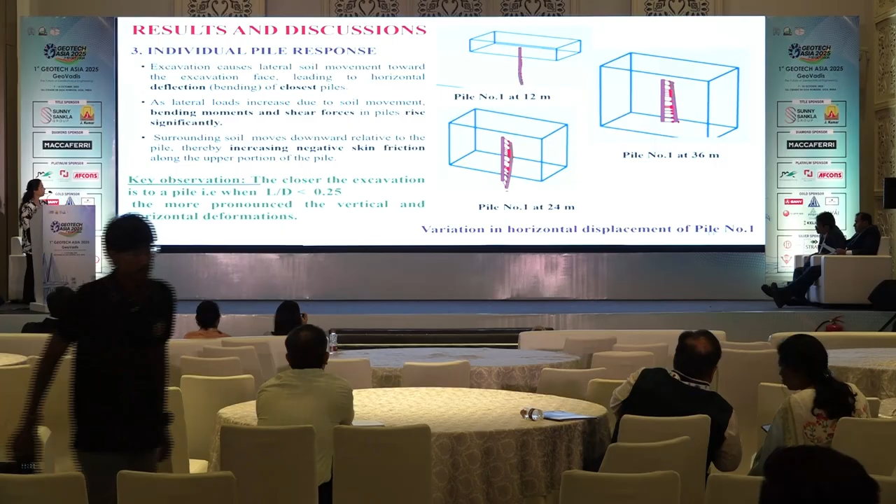The distance to depth ratio less than 0.25 is very crucial. In this graph, we again observe that when the distance to depth ratio is less than 0.25, the lateral displacements have significantly increased.

The depth to length of pile ratio, which is kept constant at 25 meters, the ratio 0.5 to 1 is the transition zone where the bending moment observed is maximum.

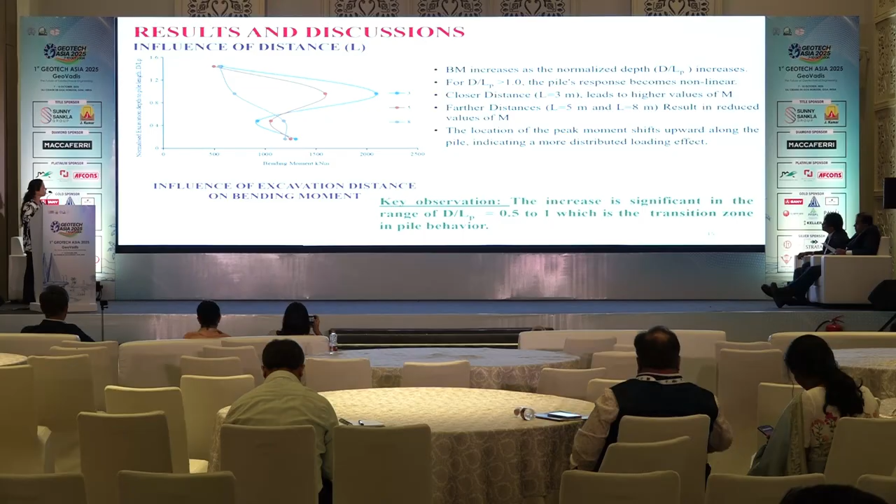To understand which pile behaves better, we analyzed 1 meter diameter piles as well as 1.5 meter diameter piles, and we observed that stiffer piles show improved resistance, that is 1 meter diameter piles are more susceptible compared to 1.5 meter diameter piles.

At 12 meter excavation depth, stress bulbs are getting truncated and soil collapse is observed. Due to loss of soil confinement, the piles lose their frictional resistance and lateral stability, which causes increased bending moments and tilting in the piles.